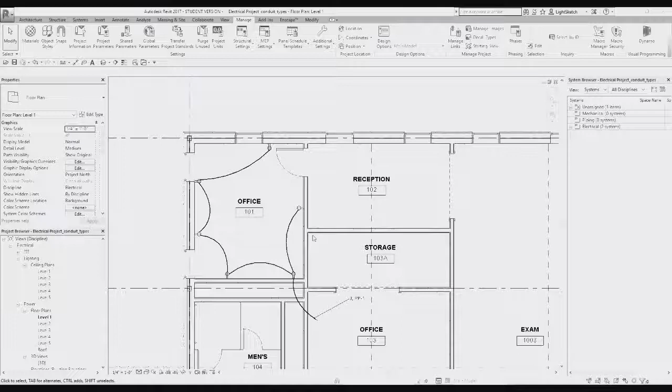So with that, we're going to take a look at first creating a type of wire. As you go through Revit and as you begin to populate your model, once you have the devices in and you have them linked up into a circuit or a system, typically you're going to be able to create a model wiring diagram. Now, I did this as I was over top of one of these devices. If I control or if I tab, it'll bring up a blue wiring diagram if you don't already have one created. If you do have one created, then you'll see what I'm currently seeing.

And I turned off my thick thin lines toggle just so that I could begin to see these a little bit more bolded. However, once you have the blue wiring diagram selected that's hidden, since Revit can do this automatically, you can click on whether or not you want it to be arched or chamfered. And you'll see in this case, I decided to have mine as an arched wiring diagram.

Well, there are a few ways that we can begin to create new wiring types, but one of the easiest ways is just to click on one of these, and you'll notice that instead of now just being the blue item, it's actually an element here in Revit, and it's been assigned to a wiring type. In order to create a new one, I just go to Edit Type, go to Duplicate, and what we're going to do is just create a low volt Cat5 cable. So if I go to Duplicate, and I type in Cat5 and I click OK, what I'll end up getting is what you see on our screen now.

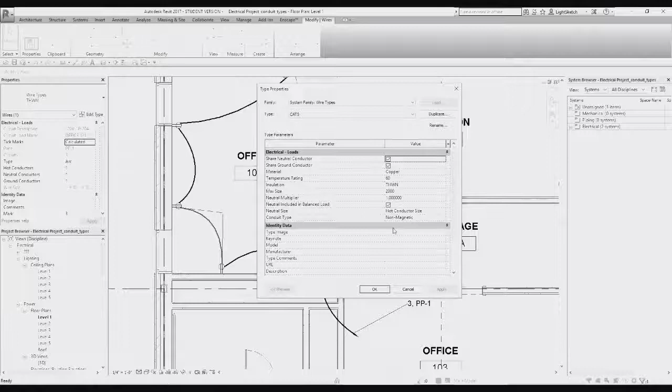And you'll want to go through, just for the purposes of having accurate information, and change some of these elements to match what they're actually supposed to be. So for example, the type of wire, the material, gauge, and so on and so forth. But for the purpose of this, we're just going to focus on how to make a new one and then begin to filter it appropriately and see this show up in your document. So I'm going to click OK. And now what you'll notice is I still have this item selected, but now it's a Cat5.

So let's say all these were on low volt, and instead of being outlets, they were remote monitoring devices. Well, I can click on each one individually or control click on multiple, and from the type selector I can select Cat5. Or I could do match property, shortcut MA in Revit. Click on the one that was initially right, so Cat5, and then continue to click through until I'm done with all these that I wanted selected.

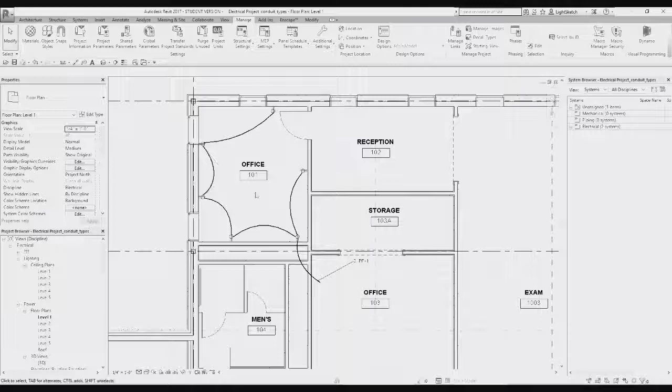So now I currently have these as Cat5, and unfortunately I don't have any way of telling, unless I tag them, just by looking at the symbol language or the line language itself. This is pretty important in terms of CDs when you're typically trying to do things fairly quickly. So how can we change this for every kind of view of this type as long as we have it set up appropriately? We're going to do this by filter.

So the quickest way to do that is I type VG and I open, since I don't have a view template on this, it allows me to modify any of these items the way I see fit. If I had a view template on there, then I would need to go over to the Properties panel, and scroll down to where it says View Template under Identity Data.

Click on the button, and then I could actually go through. But for the purpose of this one, I don't have one, so that's fine. And I'm going to go to the Filter tab. Here under the Filter tab, you'll see I don't have one set up so far, and I can click on Edit/New here, or I could click Add, and then I can click on Edit/New in this dialog.

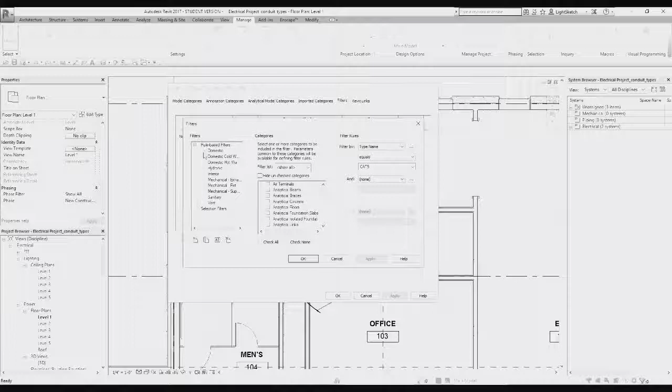Now this is going to bring up a listing of filters that are already part of the MEP environment. And again, we're talking about really MEP construction documentation or production and working drawings. So I'm going to go here to the New button on the lower left part of this panel, and I'm going to create one that says Wires, and I'm going to say Low Volt, because this is the way I like to do that in terms of organization, and then click OK.

So that's fine. First I named it. Center column, I tell what categories I want. And then the final column, I generate the rules. So I'm going to scroll all the way down, and I'm going to see what I'm looking for when I find it. So I'm going down to wires because I'm changing how the wires look. And I like to click this button called Hide Un-checked Categories. Once I have that, I confirm that I'm only doing wires, and now I want to set up the rules.

Well, the strongest way to do this is to first start with family types. So I'm going to go here to family name, equals, and then I'm going to do Wire Types. So this filter is only going to isolate things that are of a wiring type family. And in addition to that, I'm going to do type name, so that I have something else to be concerned with. And from the drop-down list, I'm going to select Cat 5.

I click OK, click Apply, and now I can select this from my Add list, Wires Low Volt, click OK, and now I have something that's only going to modify the visibility graphics of the specific Cat 5 wiring type family that we created. So here under Projection and Surface, under Lines, I'm going to click Override because Revit is preloaded with a variety of line types that you can use to have your drafting or production environment look the way you'd like it to look.

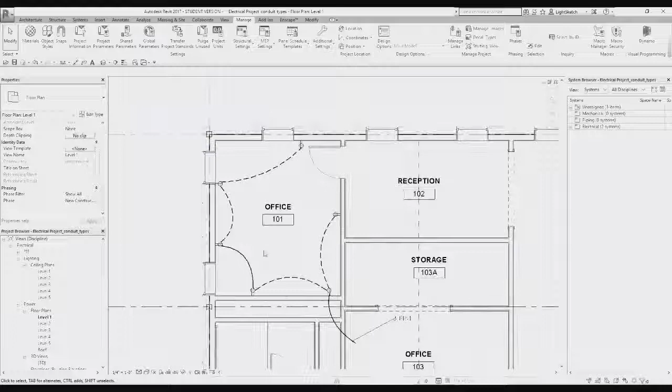And so what you'll find is as long as the spacing is right, and sometimes you have a little bit of inconsistency, like here with this one, because of the arc and the spacing, it's just not showing up correctly. But 99% of what you want to do is going to happen. So this is now a Cat 5, and everywhere I have a Cat 5 or a low volt for this drawing, when the filter's applied, it's going to show up.

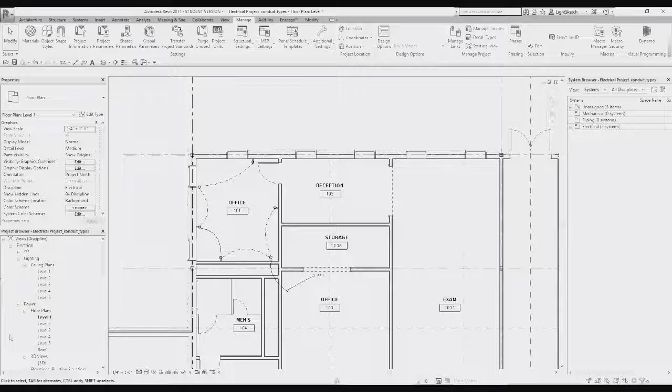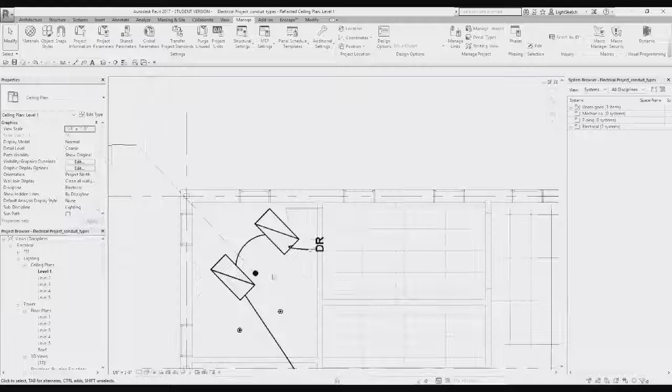Now, if I went to another drawing, for example, if I go to an RCP in this same project, level 1 RCP, I can effectively do the same thing. This is a wiring diagram for the lights, but I can simply change this to a Cat 5 if this were, say, a room occupancy sensor. And then I can go into my visibility graphics with VG, go to filters, and add that filter again. So wire low volt, click OK. That's on there, and I click OK.

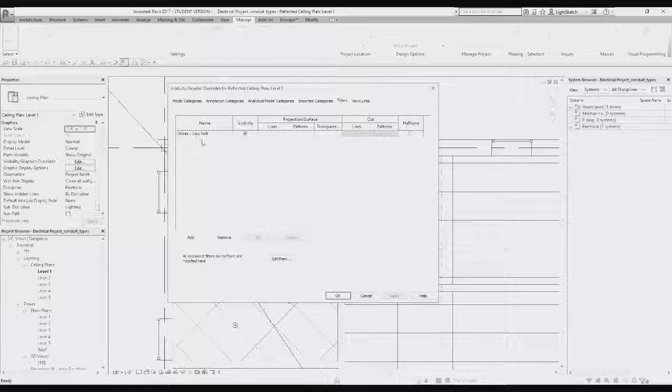You'll find as you're beginning to apply filters that you also need to adjust some of the visibility graphics settings as you go through. So we're going to simply reopen the visibility graphics menu after applying the filter. You'll notice that here under wires low volt, my lines are not overridden, so I need to go in here and quickly add this hidden line. I'm going to use the same Hidden 1/8, click OK, click Apply, click OK, and now it's showing up the way I'd like it to.

Again, you'd have to go through all the views, but you can imagine that once you have all the wiring diagrams drawn in, and you apply the filter and the line type, it would make your life significantly easier not to have to do annotation lines or something like that in order to get this to show up well.

This is all we're going to go over in this video, but I sincerely hope that this was quite helpful in allowing you to begin to wrestle with Revit and get your production drawings to look like what you want them to.